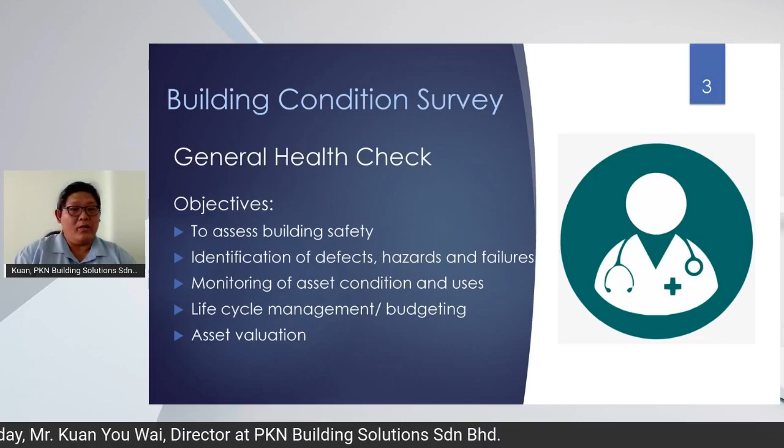We'll talk about building condition survey - basically how often the property manager should go down to the field to do assessment of the building. It's a general health check. The objective is to ascertain - the first duty of JMB and MC is building safety - to identify potential hazards, monitor the condition of the building, life cycle management, and asset valuation.

The Malaysia Property Management Standard number 3 covers building condition reports. When the property manager first receives a new building or takes over a building, the property manager shall carry out a general visual inspection audit to establish the current state of repair and condition of the building. This is written by the board, BOVAEA, for the requirement of property managers to conduct building condition surveys. You are required only to do visual inspection, and in the event that an expert is needed, the standard is written in such a way that, at the own cost of the JMB or MC, you can recommend and appoint a third-party expert to come in to help you fully understand the condition of your building.

So who actually conducts the building condition survey? The property manager needs to conduct it, of course, along with building surveyors, architects, engineers, specialist tradesmen, leak detectors, or even scientists who come down and do specialist inspections in the event of complicated issues.

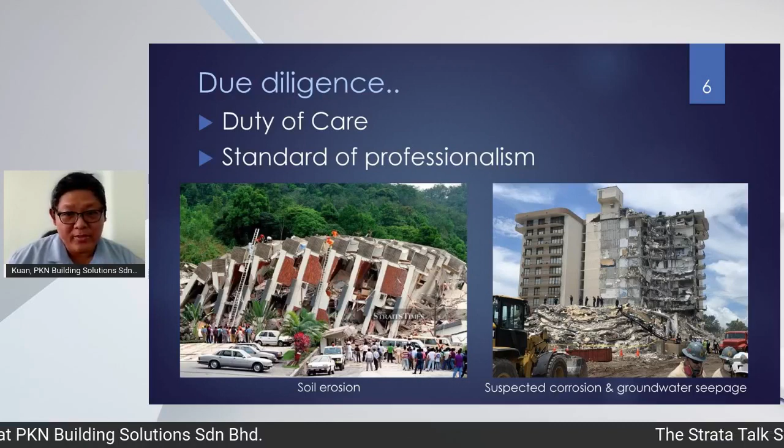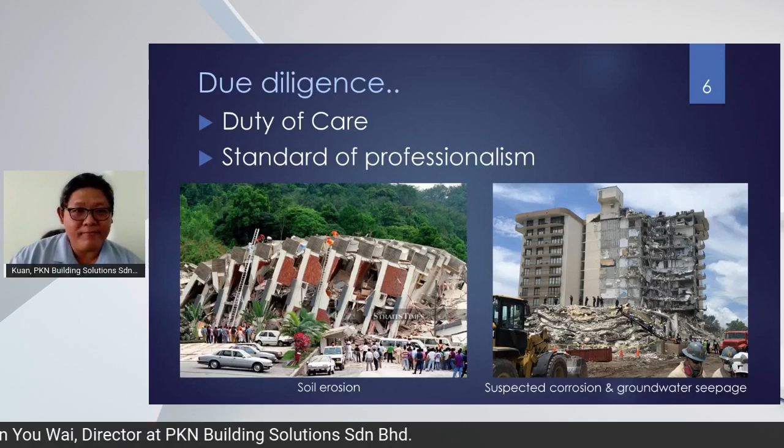But frankly speaking, when something happens, this is not really true. For example, in the event of the collapse of the Champlain Towers South in Florida two years ago - in that situation, the JMB, the property manager, even the building inspector, the building engineer who came to inspect, even the engineer from the local council who said the building was safe - now they're all queuing up in court to be queried. I'm telling you this because in reality, if something happens, the standard of professionalism will not simply be similar to what most people ought to do - you need to actually travel the extra mile to make sure your building is safe.

Due diligence for property manager: always ask why it happened, what is the correct way to repair it, what is the preventive measure, and do you have enough fund for all this rectification, inspection, and monitoring.

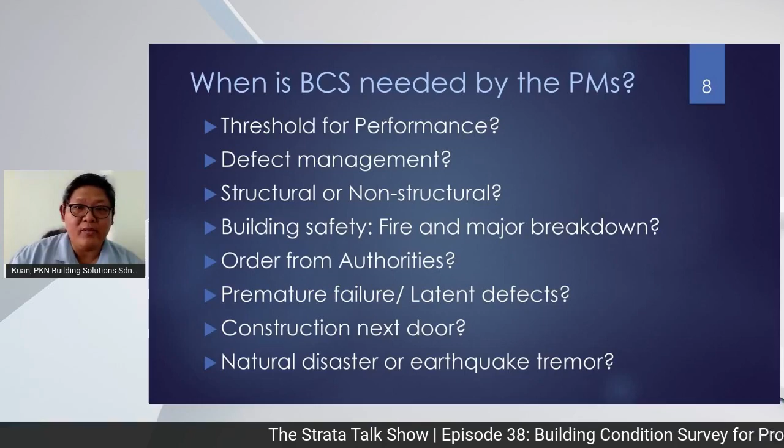So when is a building condition survey needed by the property manager? As I mentioned, it can be a threshold for performance, a key performance indicator for the property manager. It can also be required if you have a defect, which could be structural or non-structural, due to fire, due to order from the authority, or some premature or latent defect.

Just for your information, in the Strata Management Act there's no provision that allows you to use the sinking fund or maintenance fund to rectify defects, especially defects left over by the developer. You need to pursue or follow the SOP for patent defect before the expiry of DLP, and the Limitation Amendment Act for latent defect after the expiry of DLP.

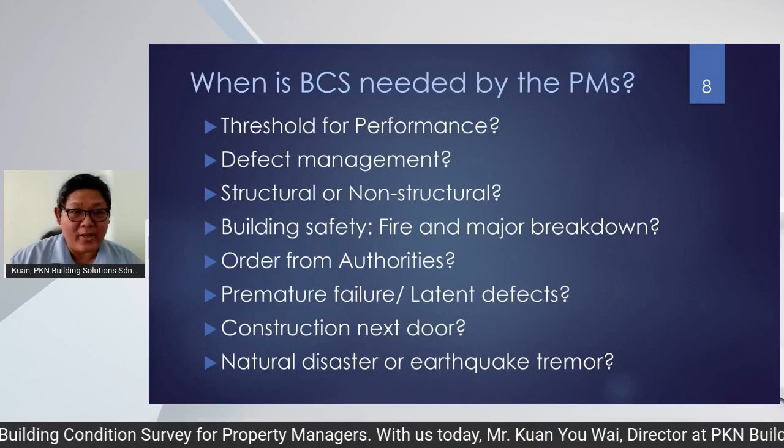And if you have a huge construction next door, you are also required to closely monitor and take more diligent steps to monitor all the cracks prior to the construction work next door. And if there is a natural disaster like earthquake or landslide nearby your area, you will also need to take more precaution and take a closer look at the condition of your building.

So how long should each building component be monitored? There's no guideline in Malaysia, but I found one from Hong Kong. Hong Kong is a Commonwealth country, and it is an urban area where everyone is required to come down to the ground floor, according to my friends—there's not enough land for people to stand. So anything that happens to the building will be detrimental to their people.

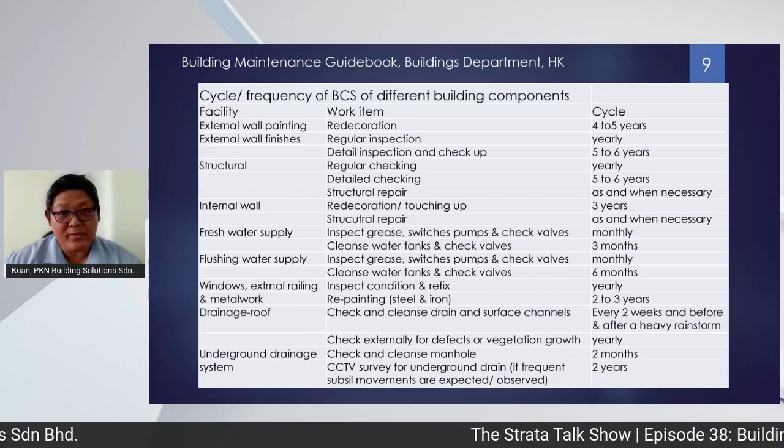As a result, Hong Kong has very strict guidelines in the maintenance of their residential and all other buildings. In fact, these are the list of items that need to be monitored. For instance, external wall painting—every 4 to 5 years you have to check one round, to see whether you need to do painting. This is a list of items you should check based on different periodic intervals.

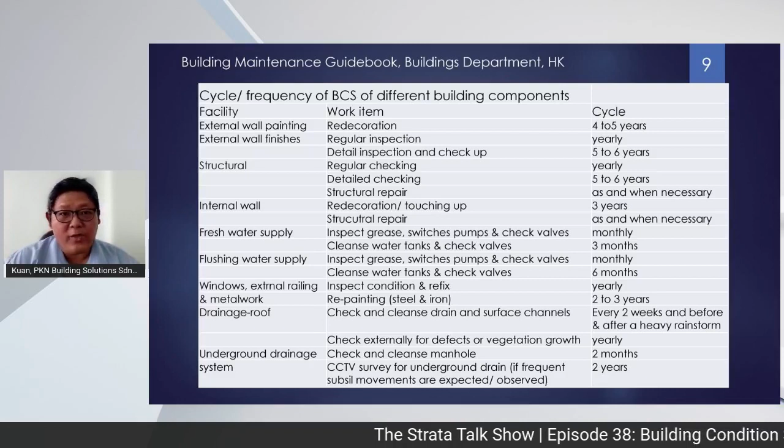Microsoft Project can help you compile a schedule for different types of inspection. There's no standard format—it all depends on the condition and age of your building. So a project management tool like this will be very helpful in this case.

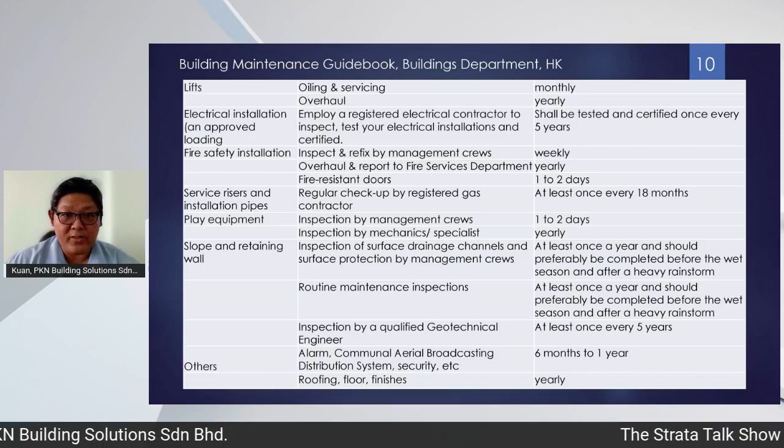The list also continues for electrical installation, every 5 years, and some items like fire safety installation, even on a weekly basis.

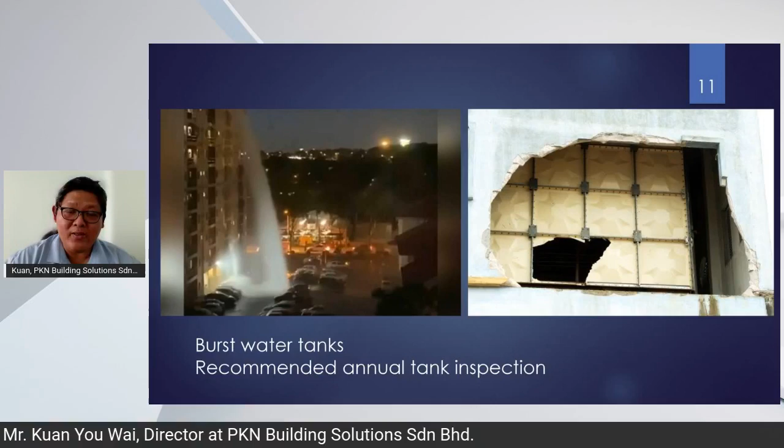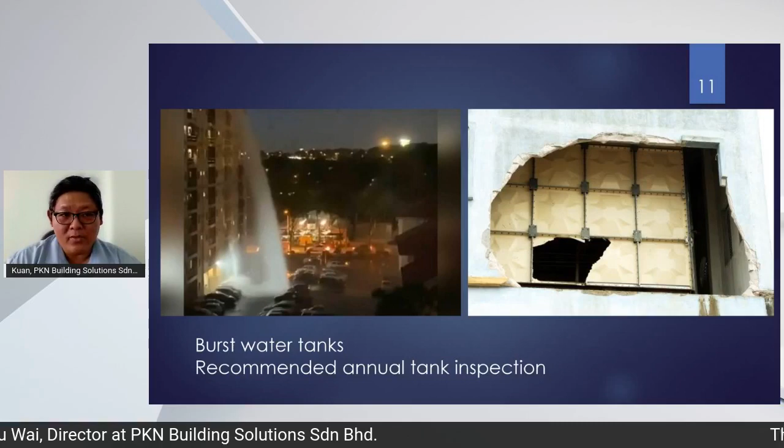But something I want to highlight now: we have a lot of problems with water tanks nowadays. My conversation with some former COBs actually told me this is in fact quite common, because our water tank is most of the time subjected to weathering—subjected to rainfall, subjected to sunshine—and polymer or metal material will degrade rapidly in the event of weathering, especially if you are close to an industrial area. The acidity of the rainwater will even accelerate the degradation further.

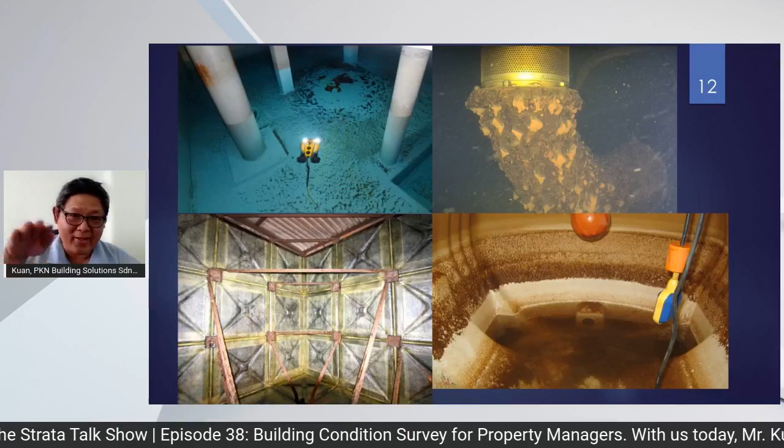As a result, we have a number of issues nowadays with water tanks bursting and walls collapsing. In UK, Australia, and Singapore, it's recommended, and actually made mandatory nowadays in some countries, that all water tanks need to be inspected once a year. We have the ROV, remotely operated vehicle, which looks like a mini submarine connected to a wire, so you can clearly see what is inside the tank.

This is actually in line with what is recommended by the Ministry of Housing, KPKT, and the Ministry of Health, because the condition of the water is also a health issue since it's consumed directly.

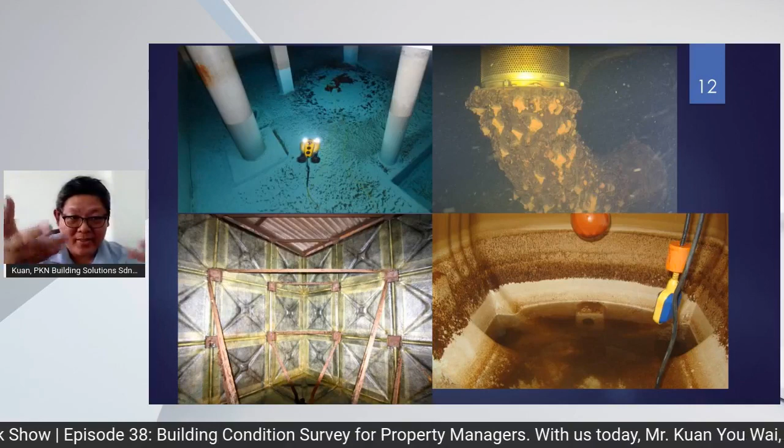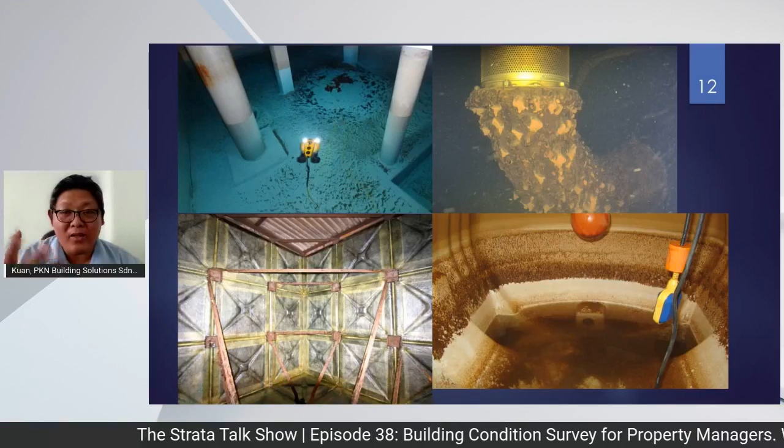Secondly, the sludge that settles at the bottom of the water tank is actually heavier. If the sludge accumulates so much that it becomes too heavy for the tank's design to hold, or the tank's metal strap starts to corrode, or the screws start to corrode, or the underwater fittings start to corrode, the strength actually starts to reduce and compromise—and that is why some water tanks can give way.

So I would suggest that for water tanks nowadays, especially in Malaysia, there is a need for regular monitoring of the water tank.

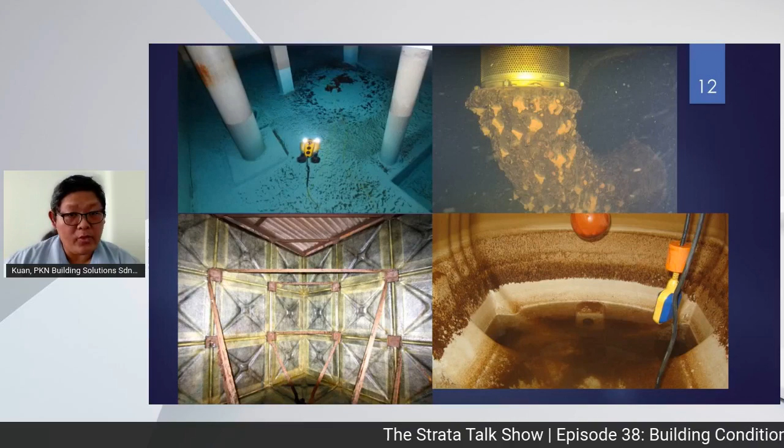And of course, there are different formats when it comes to how a report should be done for a building condition survey. There is a format from JKR, Royal Institute of Surveyors Malaysia, Royal Institute of Chartered Surveyors UK, as well as a format from DBKL.

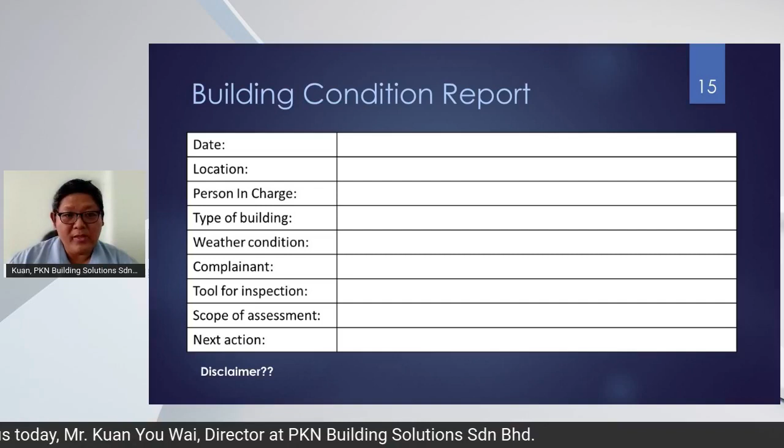Actually, in my type of report, I even have to clearly describe what is the methodology of inspection, scope of inspection, next action. This is particularly important for property managers because of the next action, and who is the person in charge. These are the details that you need to have when you do follow up. And I always encourage property managers to have a few simple testing tools like this, or inspection tools like this.

Moisture meter, it has one anode and one cathode. If you put it on the surface with water, then the circuit is completed. The more water on the surface, the more electricity conducted. As a result, you have a linear relationship between the reading and the amount of dampness. And this is very useful. And it can be used for even doing ponding tests, flood tests.

Before I do a ponding test, I will take a moisture reading one time before and one time 24 hours after the ponding test, using a moisture meter, because it can quantify the dampness, and I have a figure for comparison. Tapping rod is very important to check hollowness, and corrosion starts from delamination. That's why when we check corrosion, we actually start by checking delamination. As a result, tapping rod is very useful.

And because water can conduct electricity, before you put your hand on any wet area, please have a non-contact voltage tester to verify that the place doesn't have electricity. This is for your own health, own safety. And a pressure gauge like this can verify the pressure in your domestic pipe. Bear in mind, Suruhanjaya Perkhidmatan Air Negara has a guideline. The water pressure should be between 10 meter head to 30 meter head, or 0.98 bar to 2.94 bar.

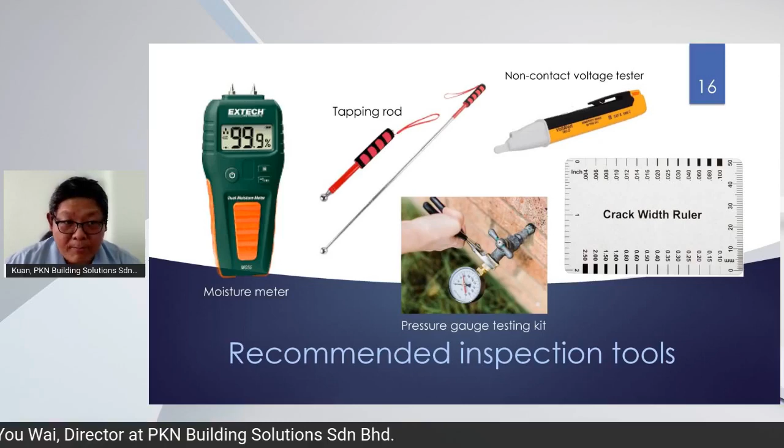This is something that you have to keep on monitoring, because in the event that you supply unsafe water pressure to the unit and the pipe bursts, management kena bayar. Okay. And of course, crack width ruler: based on British Standard 8110, any crack width more than 0.3 mm is a structural crack. Of course, on a structural element.

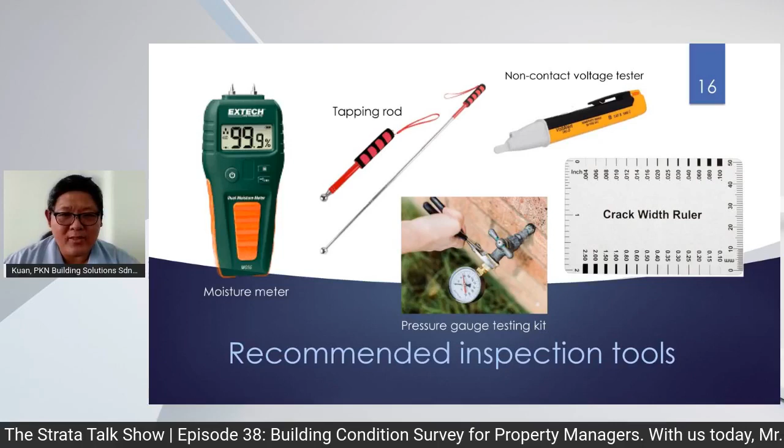Okay, so all these are simple equipment that doesn't cost a lot. Maybe the most expensive one is the Extech moisture meter, which can cost around 300 ringgit. But the rest is not expensive. So I would urge property managers to have this equipment with you to closely monitor your building.

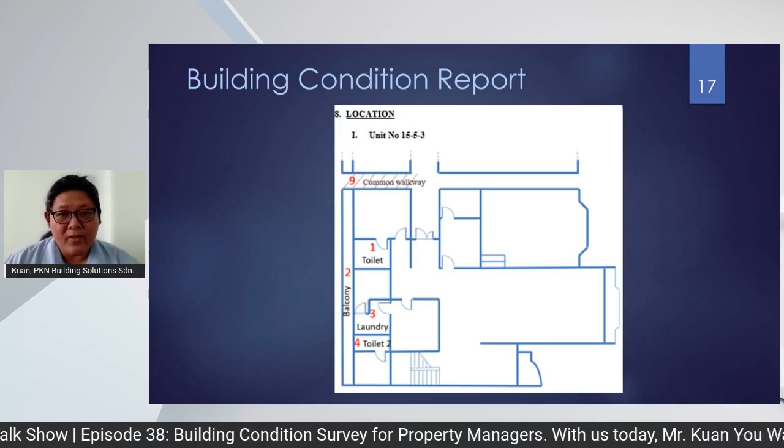So next is the building condition report. Of course, for a building condition report, you need to have a floor plan to indicate where you do the inspection. So in my type of report, let's say for a house, I will indicate photo number one or defect sheet number one, which actually corresponds to number one in this floor plan. So defect sheet number two is the second location.

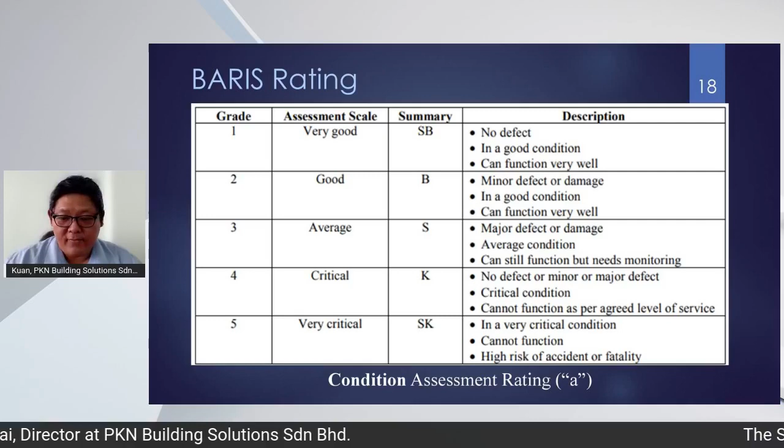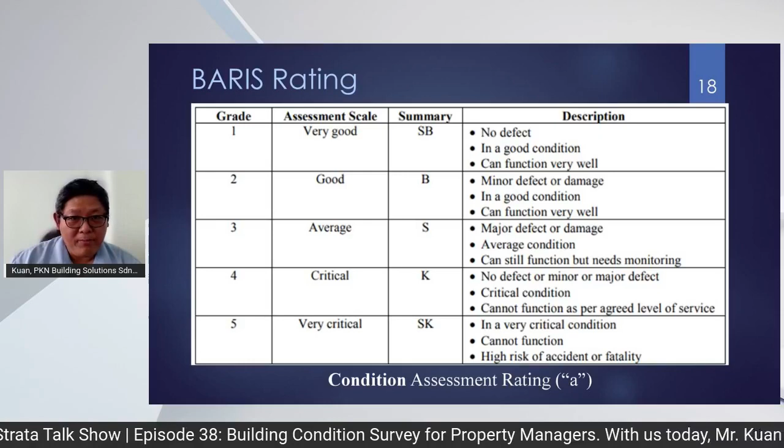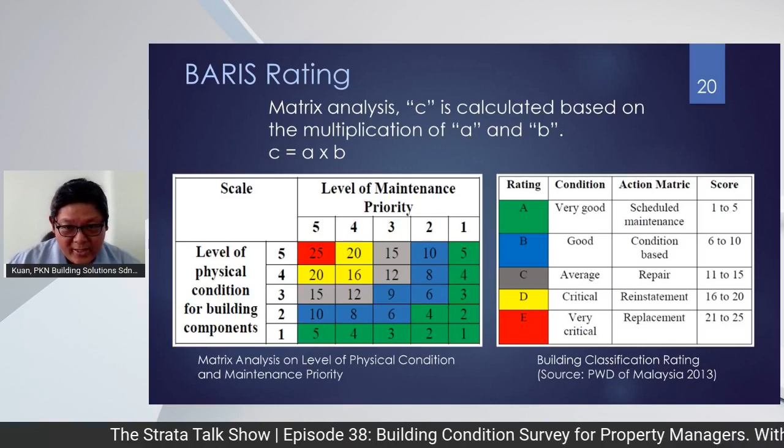Okay, this is, let's say, just now level of maintenance and level of physical condition. So level of maintenance means does it need to be replaced now, or is it just a regular maintenance issue? So it has different numbers, and as compared to the different number assigned for the condition of the building, when you multiply it, the different number actually gives a different rating. So in the second table, for the rating condition, action matrix and score, it gives an indication of the condition of the whole building if you sum up all the items together.

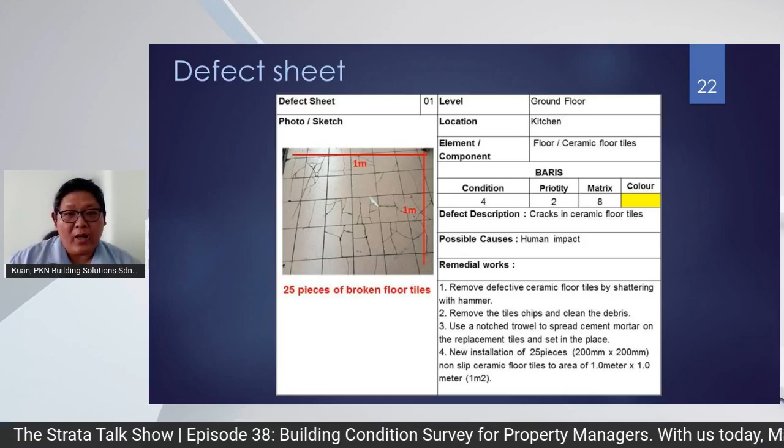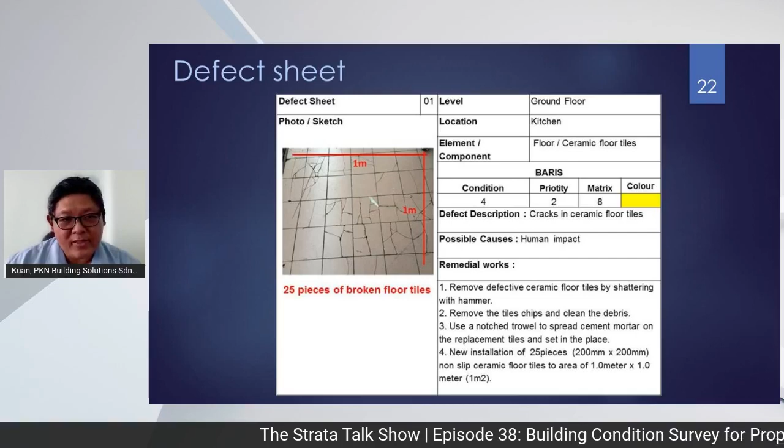Okay, so this is how my report looks like. This is the JKR report. Okay, I think I'll go to this JKR report first because the JKR report has columns for narration as well as a column for the photo. I find this format doesn't offer enough space for the photo. As such, I modified the format to maximize the area for the photo.

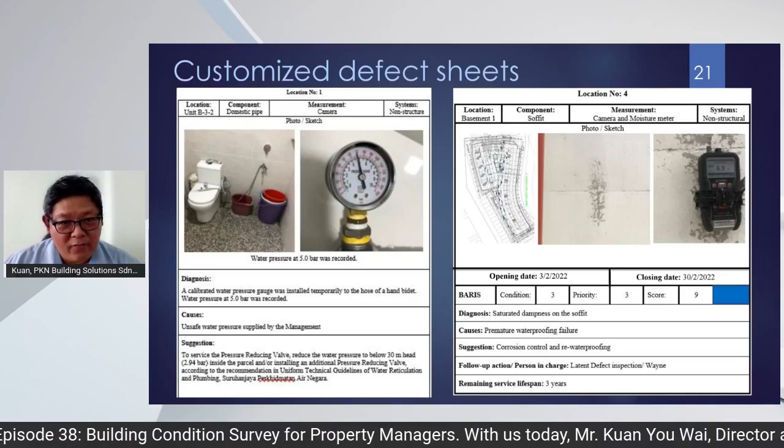And let's say the first one. First one, I put all the detail at the top and at the bottom. Center, I keep the maximum space for the photo. And this modification, so long that it works for you, is fine. There's no fixed format for it. And this format I actually use for one shot or one time inspection.

If for the purpose of monitoring, you can have more detail. Let's say opening date. When was the first complaint? When is the closing date? Closing date means the defect has been rectified. The case should be closed. The diagnosis, the cause, the suggestion, the score can be also included, and I even include a small floor plan to indicate the location so that I don't need to go back to the page with a lot of locations. It is for easy reference purposes.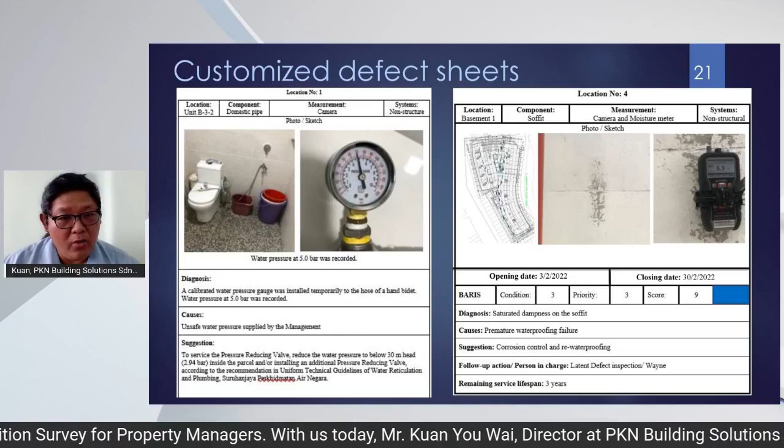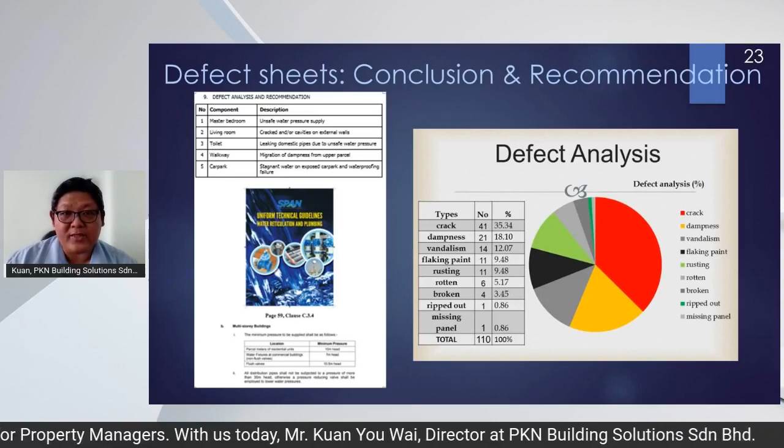So my point is you can modify the format to your own need, so long that whatever information you would like to monitor is all systematically written there. Okay, and in my kind of report, I will also have a conclusion about the overall assessment, the overall summary, and I also can do a chart in this way to tell what type of defect or problem or issues is mostly found in your site. So with this, an overall picture can be given. So this is about the format of the report.

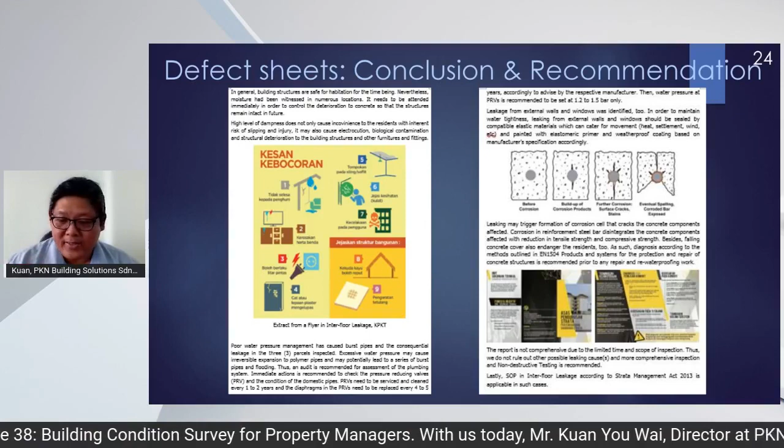Okay, and I also have big space to do a narration or summary of what is the next action. At this location, this conclusion and recommendation, I can have the luxury of sufficient space to do all types of explanation for the typical types of defects. This is the format of my report. And I would like to bring your attention to life cycle management and building safety.

So 10% sinking fund. From my conversation with a number of property managers, 10% sinking fund is the mandatory requirement set during the developer regime, whereby the developer becomes the property manager before the formation of JMB or MC. So okay, but for your information, this is the minimum. It's not the maximum.

In fact, based on the list that I explained just now, we need to do the asset listing. We need to know the life cycle management by understanding when these building components need replacement or refurbishment or redecoration, and we need to do a projection, a project management chart, to see in 10 years which year I need to do my painting, which year I need to replace my lift, so that we can have an overall understanding of the capital expenditure that will be coming in 10, 20 or 30 years to come.

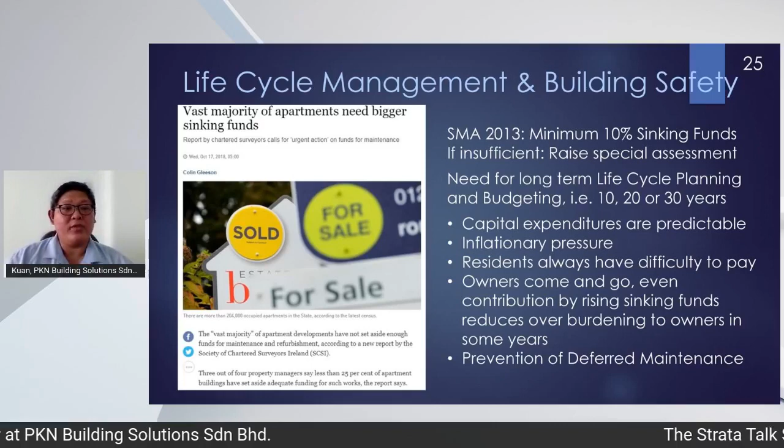So based on the collection of our existing sinking fund, is it sufficient to cover all the capital expenditure? Because bear in mind, the first duty of JMB or MC is building safety. Okay, so you need to make sure you have enough fund so that in time to come, when the building components need replacement, the money is there. Okay, that is for the purpose of keeping the safety as well as the functionality of the building.

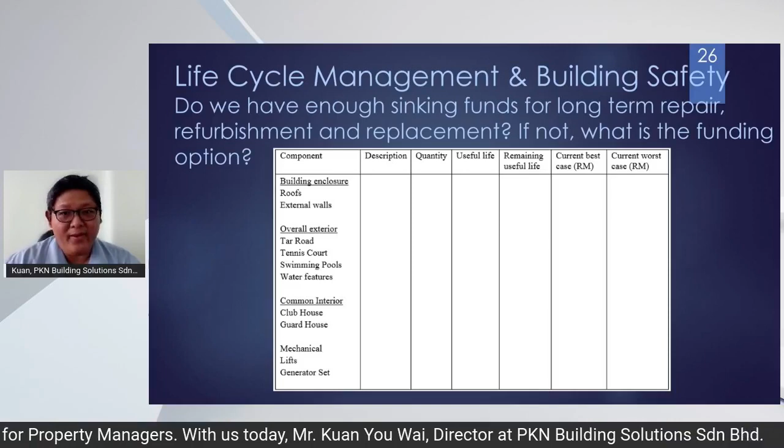And I would like to show you a useful chart that I got from the research study in North America. This is a list of the building component, the quantity, the useful lifespan, and the remaining useful lifespan, current best and current worst. What is the meaning of current best?

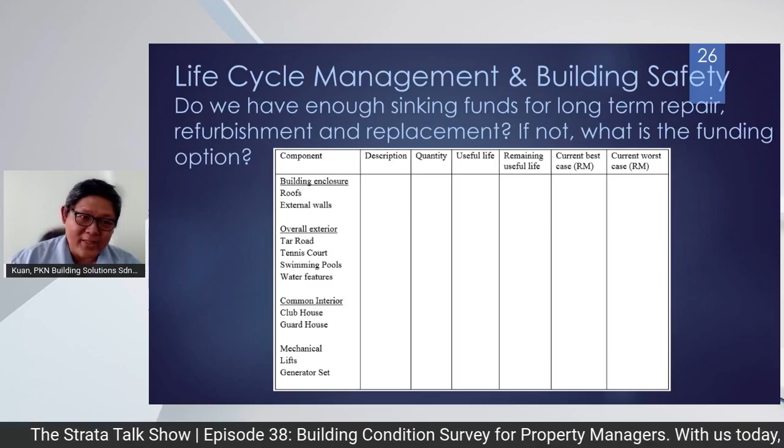Okay, let's say the genset or the lift, when it is due for replacement, what is the most positive or optimistic estimate of the expenses involved? And what is the minimum and what is the maximum. So the maximum is the current worst case. That's why we use the word current, because we need to factor in the inflation and to rediscount the amount to see if the collection that we are collecting at this amount or this percentage will be enough to finance all this capital expenditure in future.

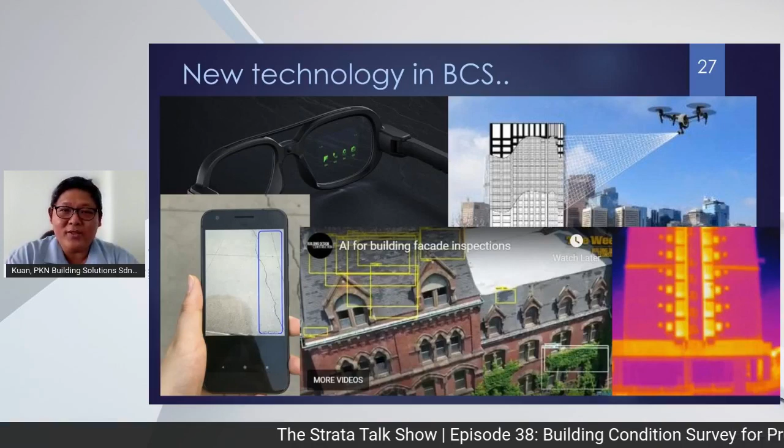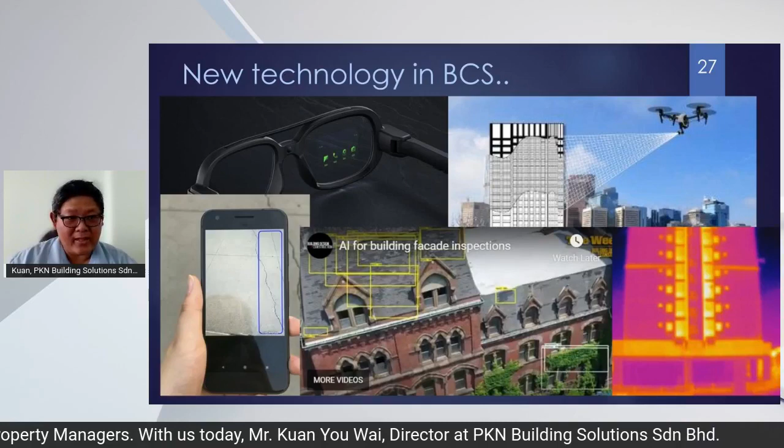So I would also like to bring your attention. Nowadays, we have so many new technologies. Artificial intelligence is coming into the building survey industry. So nowadays, we have artificial intelligence which is integrated into drones, spectacles, or even handphones that can recognize building defects by themselves, so long as we give them good enough training to know, okay, this damp patch is a defect due to dampness. So the computer actually can recognize it. From the statistical study, they can recognize it faster and more accurately than humans.

So infrared imaging is also coming into the building condition survey industry. See, this is how the artificial intelligence can detect defects by themselves using a drone. And of course, I would like to show you what are the typical defects that a property manager should look for when the building starts to age.

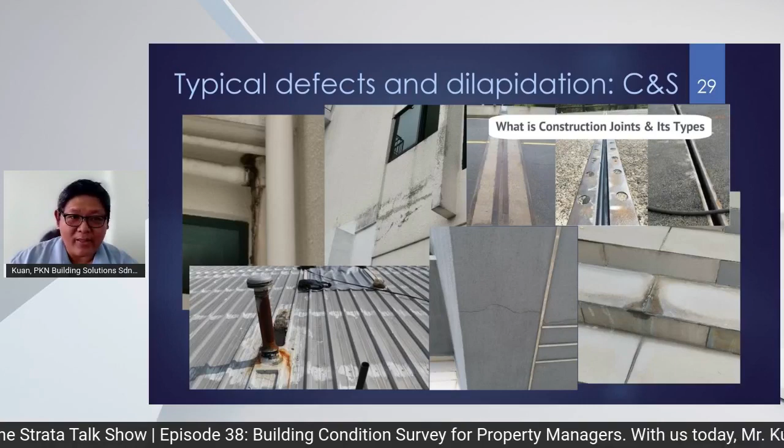Let's say the leaking, the rust, construction joints must be replaced regularly. The cracks, some are cosmetic, some are not. So efflorescence, if it is at the stairs, it's actually very dangerous. It's very slippery. Okay, so all this you have to start to look at on your site. And of course sealant on the skylight roof is something that you should understand needs replacement over time. Water tank, at least check the screws and nuts from outside.

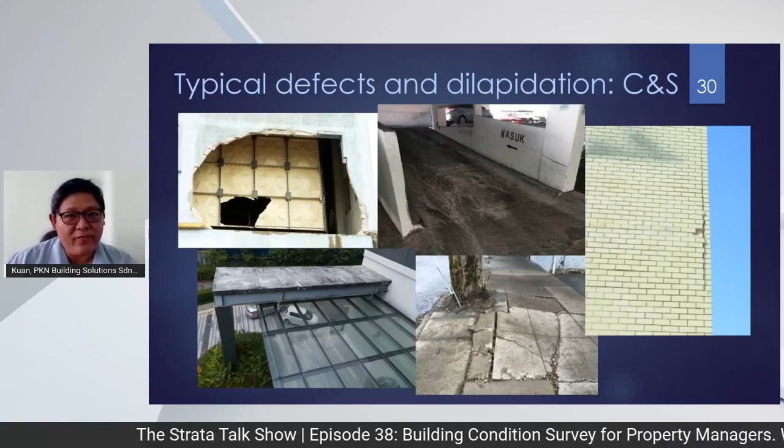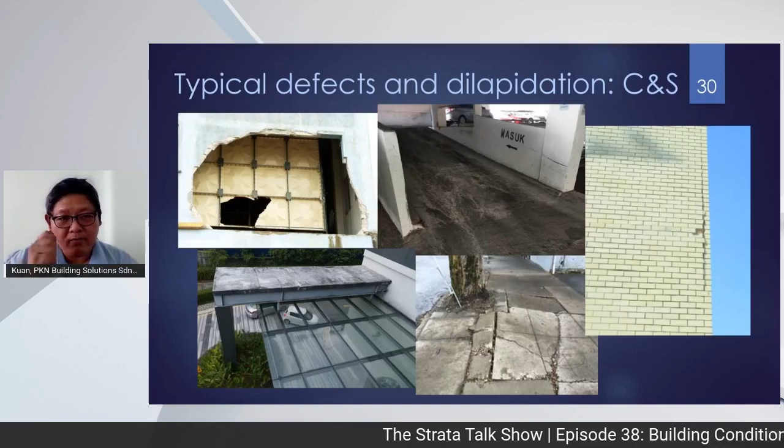The abrasion, the crack, the roots that can cause the road to crack, as well as delamination. Delamination always happens because of the way we construct buildings that don't come with construction joints or expansion joints. So with the expansion and contraction in Malaysia, we always have this type of heat-induced crack that can endanger the public and the user. So a tapping rod is a very good tool to check all this. Okay, this is something that you need to look at.

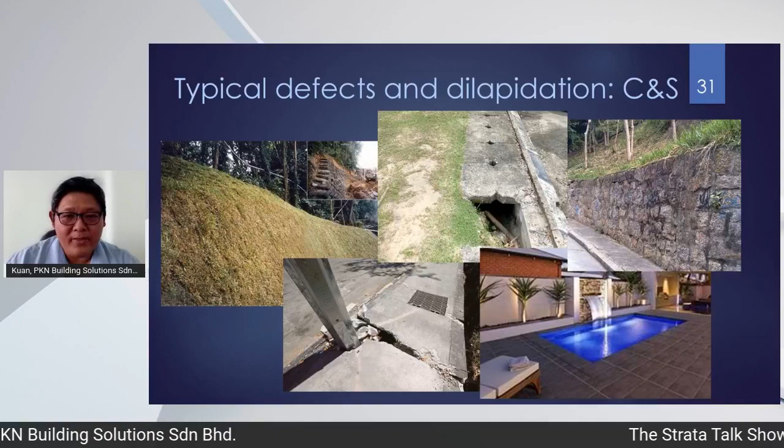Before the arrival of the rainy season, check your drain, any blockage, any crack that water can seep through. Check the slope. These are the things that you should always check. Swimming pools always leak in Malaysia. Please check. And most importantly, the M&E room must not have leakage. Okay, nowadays we have a lot of lift pits having groundwater seepage. So all this must be looked into visually by a property manager. And copper tape for your lightning arrestor always gets lost, right? So also always check on your copper tape.

Okay. When is the time that you need an expert to come in? I would like to bring your attention to high water pressure. High water pressure is synonymous to high blood pressure, because the higher the pressure, the higher the likelihood the pipe will burst. And I would urge property managers to always have a pressure gauge assembled by your people to monitor the water pressure at different locations in your building. Just simply tap into the faucet or hand bidet, and you can measure the water pressure.

And bear in mind, the pressure reducing valve needs to be serviced and cleaned. The diaphragm needs to be replaced regularly. So depending on your manufacturer, please contact your manufacturer for them to do cleaning and servicing, and ask them, with this model, this brand, how often do I need to clean and replace the diaphragm of the pressure reducing valve.

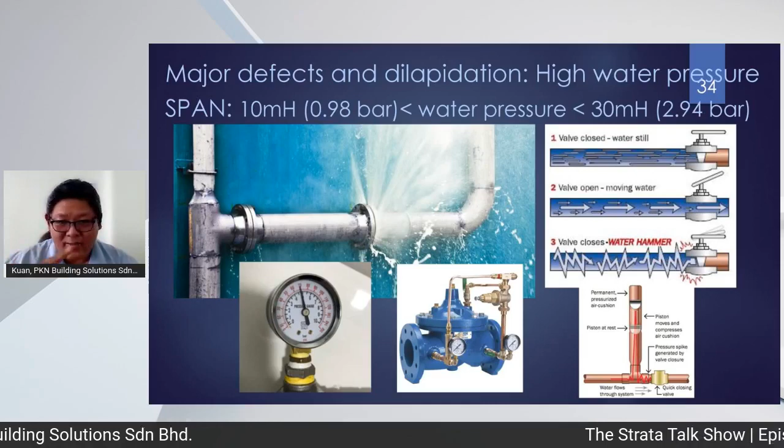And if you have the situation whereby you have the banging sound from your pipe, it's actually due to the momentum caused by the movement of water which is suddenly stopped. So this momentum can be as huge as 600 pounds, and you actually need a water hammer arrestor to handle this type of situation.

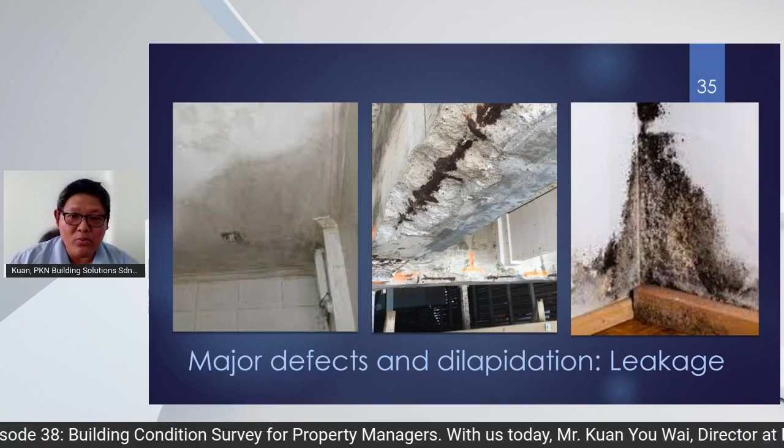So when there is corrosion, when there is seepage to your concrete, when there is mold, you do need specialists to come in. Okay, because we need scientific tools to measure the corrosion risk using the half cell corrosion mapping method. And I would like to show you. Okay, the first photo, you have some sign of dampness but no cracking, no rust. Quickly repair it.

The repair is still cheap. Okay, but if you start to have rusty signs, the reinforcement steel bar will expand, and it will keep on expanding in this corrosion process up to 6.25 times of the original diameter. As a result, the crack actually comes from inside. For your information, before any repair, the mechanism of cracking must be stopped by using cathodic protection, sacrificial anode, or

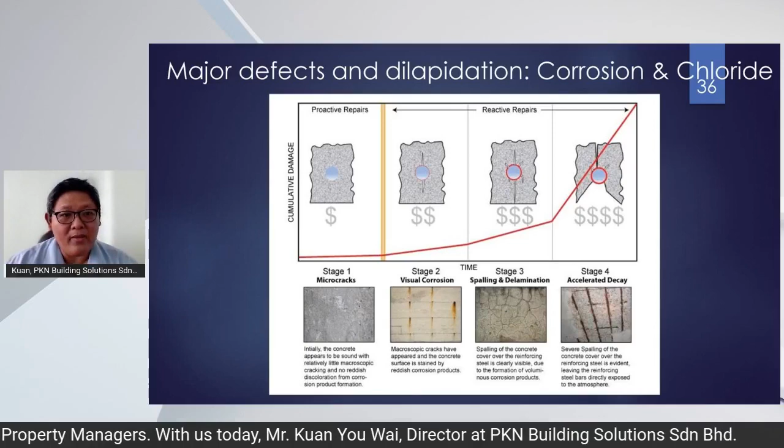corrosion inhibitor. So when you have the third stage, whereby the crack has been so obvious, delamination has started, the cost of repair is even higher. And when you have spalled concrete, the cost of repair will be so high because corrosion must be stopped. The mechanism of cracking must be stopped before you re-waterproof it. Simply because if the engineering fault or cracking mechanism is not stopped, the warranty is null and void.

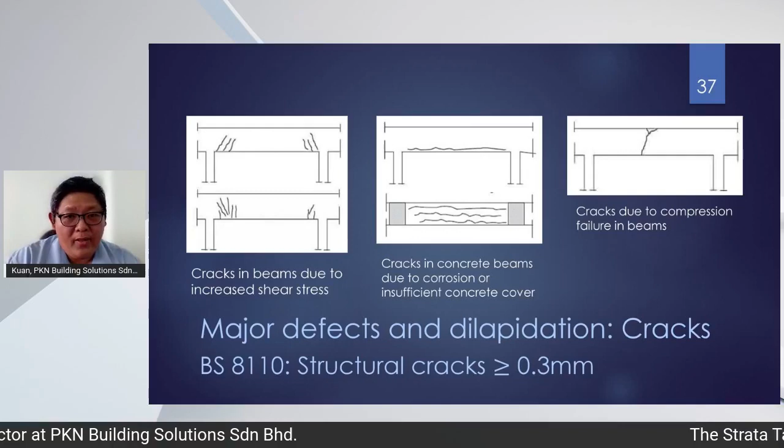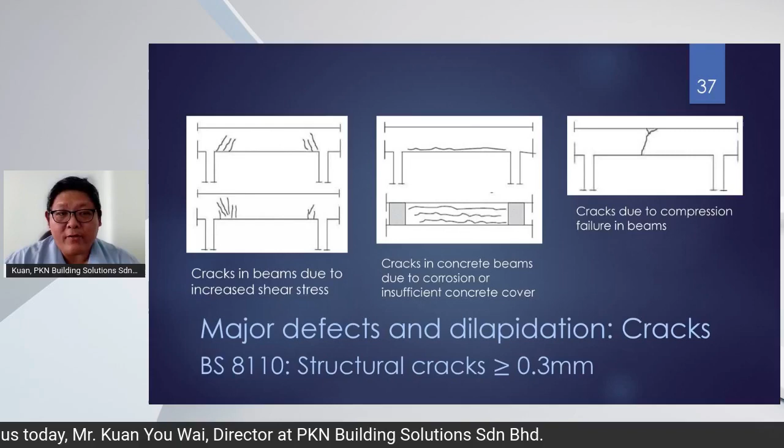Another type of thing that is dangerous: shear crack. Shear crack is very dangerous. Any structural engineer will know that. But of course, corrosion-induced crack is also dangerous. Crack at the center of the beam, from top to bottom, is also equally dangerous. For all this, there is a British standard, BS 8110, that says that if the crack is more than 0.3 mm, it is a dangerous or structural crack that you need to bring in a structural engineer for review.

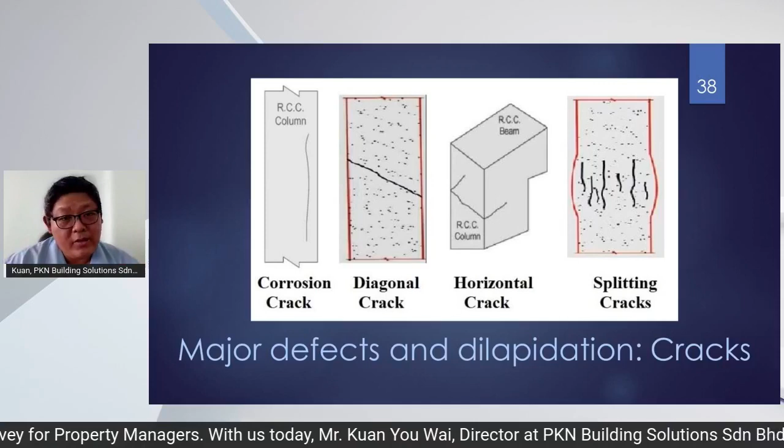Pillar. The pillar, or column, is the building component taking the maximum load. Any crack or deformation is not acceptable. So when you see this type of crack, do get in a structural engineer. And a building is not designed to float on water. And the pH and the mineral substance in the groundwater or water that emerges from the ground, it can be wastewater because the waste pipe is always embedded into the floor.

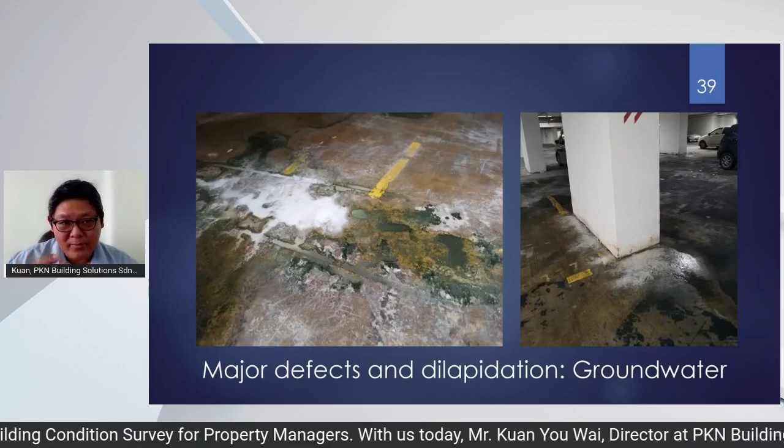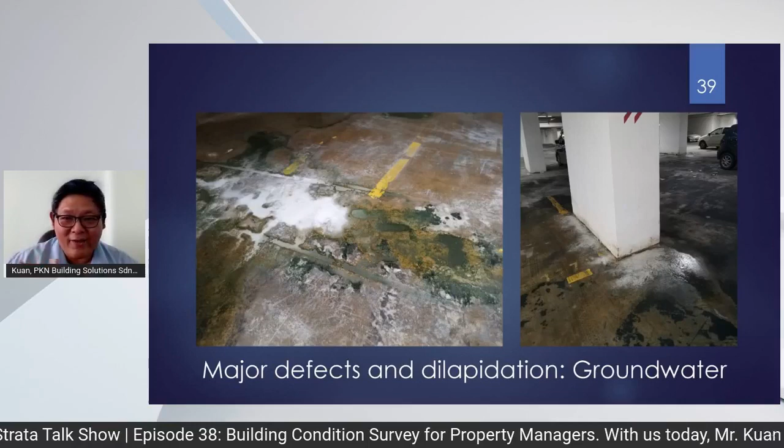We can understand the origin of the water by doing a lab test. So we can check the pH. We can also check the E. coli if it comes from the waste pipe. If it comes from domestic water, then the chemical composition must be very close to the domestic water. And lastly, if it comes from groundwater, it depends on the type of rock inside the soil. If you have a lot of limestone, the pH is highly alkaline, no corrosion will happen. The issue is if it has chloride or other chemicals that are corrosive, then corrosion will be very bad.

I would like to bring to your attention this periodic inspection because 2 days ago I met an unusual crack on a pillar, and I advised the building manager Kat that she can opt to trigger an earlier periodic inspection by writing to the Jabatan Kawalan Bangunan, Building Control Division. So, writing to them to tell that you want a periodic inspection, you feel something is wrong, you are so worried. Okay, so by writing to them, let's say in the eighth year of your building, tahun ke-8, you get all the periodic inspection done. You engage a registered structural engineer, registered with the Board of Engineers.

So everything is done. Let's say in the 10th year, the Jabatan Kawalan Bangunan sends you a letter to request you to do periodic inspection. You actually can show them this letter saying that I have written to you for early inspection and I have done it according to your SOP, and now I should be exempted because I have just done it. So in the 10th year, your letter I received, but I am telling you that I'm exempted because I have done it in the 8th year. So the next periodic inspection should be in the 18th year. So by this way, you are actually saving money.

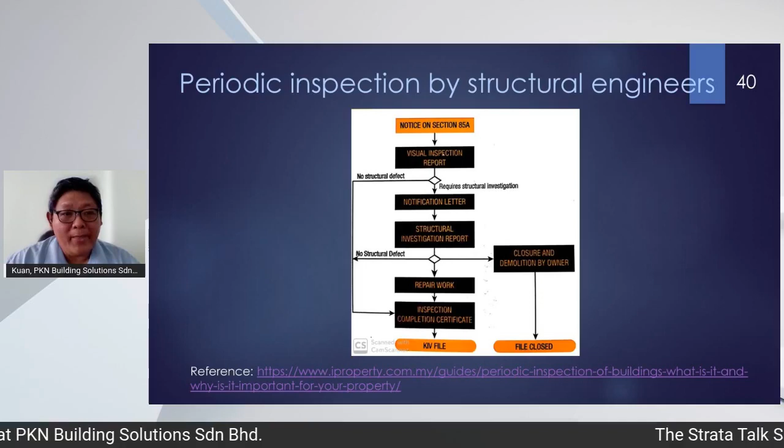At the end of the day, based on the Street, Drainage and Building Act 1974, the mayor or the Jabatan Kawalan Bangunan is the sole party, the sole authority that can tell people about the building, about the condition of your building, safe or not safe or otherwise.

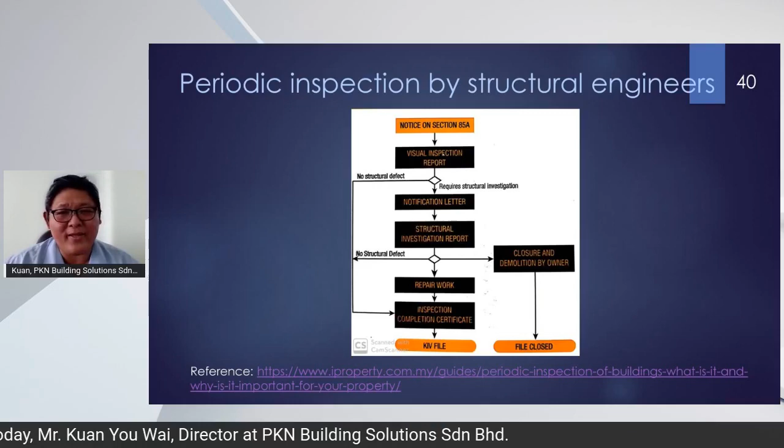So please do not hire any structural engineer just because they are structural engineers. You actually indeed have an SOP to follow based on the Street, Drainage and Building Act. Okay, so do not simply engage, but I can help you. I can advise you who can do a very good job on this.

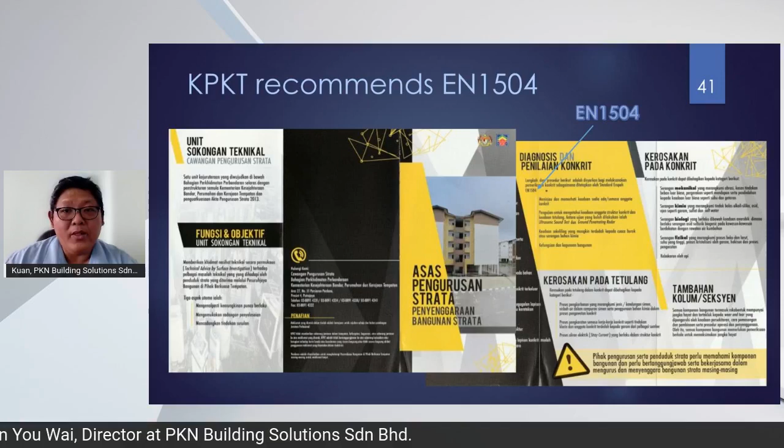And the Ministry of Housing recommends EN 1504 when it comes to diagnosis and repair of concrete structures. EN 1504 encompasses the repair of concrete as well as corrosion control. It is a holistic and scientific manner to do structural repair.

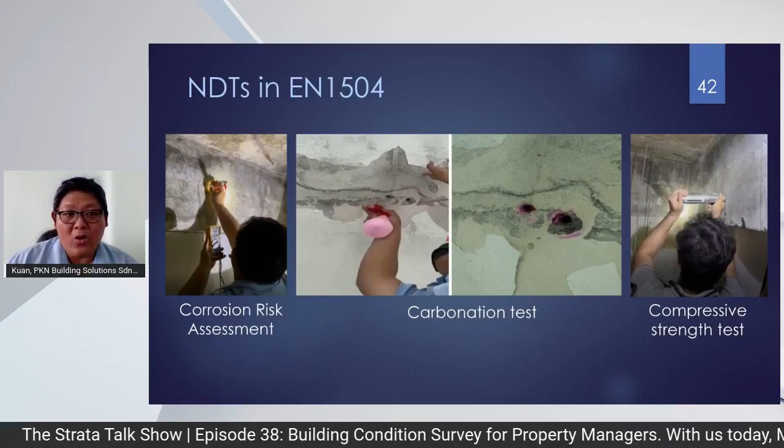So in the event that there is corrosion or cracking like this, we actually did rebound hammer testing as well as half cell corrosion mapping to see if the corrosion has started. We also do carbonation tests using phenolphthalein solution to check if the carbonation has entered into the reinforcement steel bar. All this is based on scientific method, which is based on some Euro norm or American Society for Testing and Materials standard. Okay, this is what EN 1504 recommends.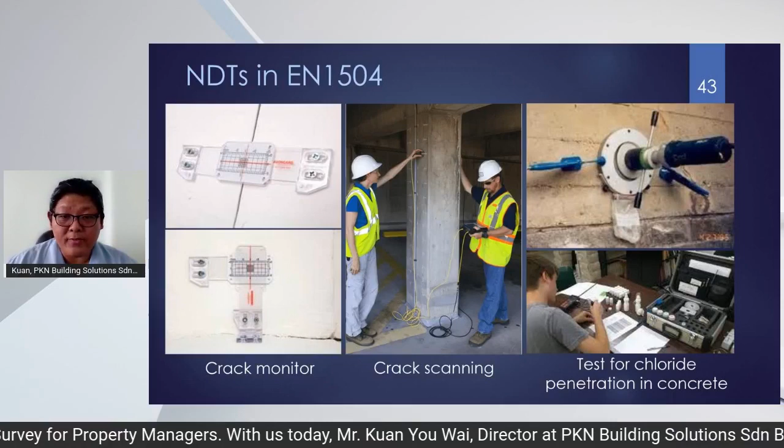So if you have a crack, you need to see if it is a dynamic or a static crack. We can install a crack monitor. We can also check the crack pattern inside the concrete using impact echo, okay, as well as doing chloride penetration tests to check the chloride contamination in your concrete. EN 1504 also recommends scanning of the reinforcement steel bar using ground penetrating radar or cover meter.

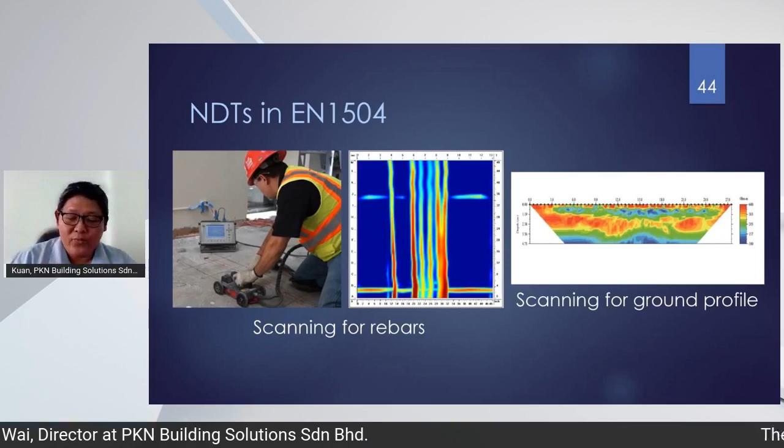Nowadays, for ground, we can also do tomography. We can do scanning of ground up to 50 meters deep, 80 meters length. Okay, if we do it cross in this way, we actually can have a 3D understanding of the soil profile as well as the groundwater profile.

And for, let's say, flat roofs, there is an ASTM standard C1153 for detecting the water pocket under the flat roof due to waterproofing failure using infrared imaging. So this is what my team is doing at different sites.

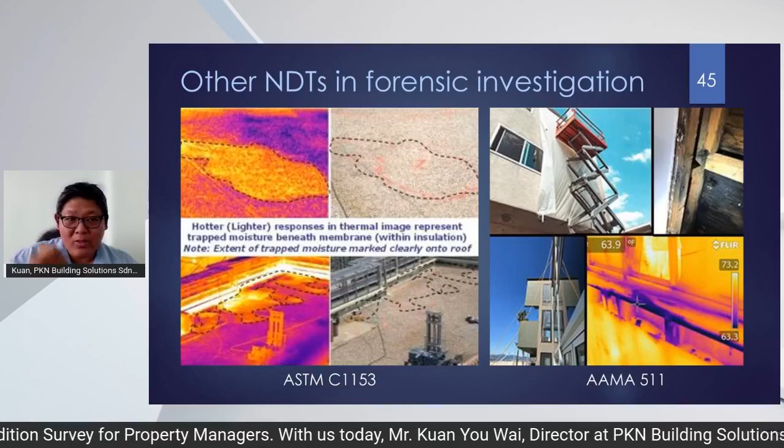And for window or external wall cracks, we also can do another test called spray testing with a special nozzle. When pressurized at 2.5 bar, the water that sprays out is equivalent to the rain induced by wind at 30 meters per second. 30 meters per second wind velocity is actually the wind loading of one of the Malaysian standards for the design of building envelopes in Malaysia.

So I would like to share a case study with you. There's a case whereby the cement screed started to fall down and splash on the road. In this case, I actually used the guideline from the Hong Kong Concrete Institute to use infrared to check the delaminated area.

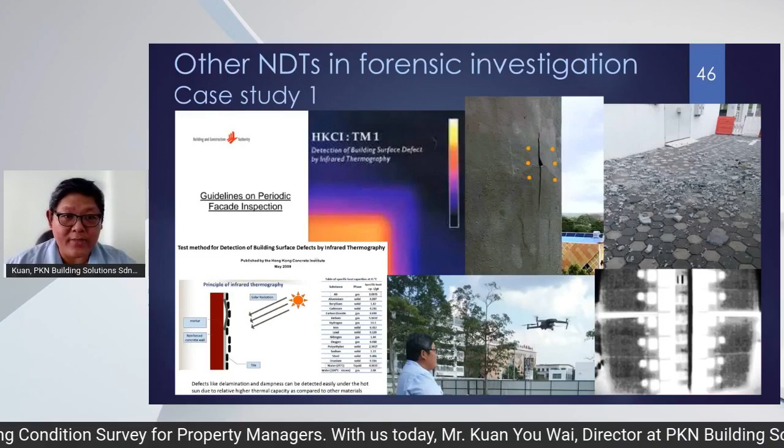Why can we use infrared? Okay, if water is hidden behind the cement screed or air is hidden behind the cement screed, when the wall is exposed to solar energy, the delaminated area will become hotter. So this is the diagrammatic explanation of the theory. And besides, we also deployed the guideline from Singapore to do close range inspection.

So this is my infrared drone, and we even erected scaffolding to extract samples to check what is behind, what is the condition of the base as well as the condition of the cement screed. We sent the cement screed sample to the lab to do a water absorption test as well as composition analysis to see how many percent of cement is there. We can also do pull-off tests and knocking tests.

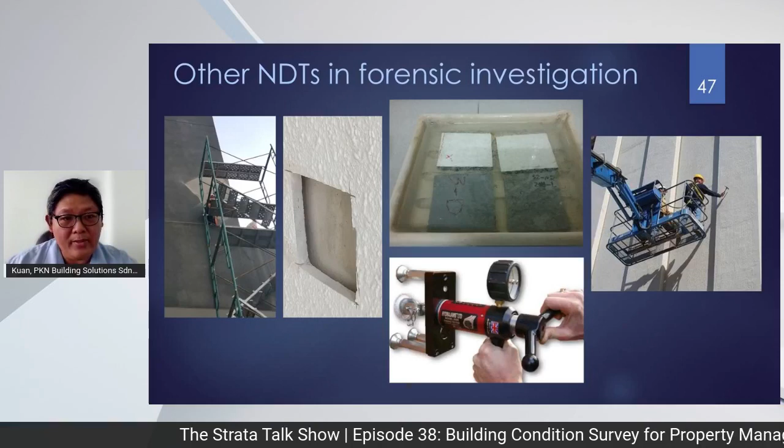So all this will help us to understand the reason why the delamination happened, so that we can have grounds to take corrective action, be it legal or be it technical.

Another case, the basement with water seepage. Okay, coincidentally, above the location there is a hydrant. So I marked A, B, C, D on the wall, and water started to drip from the hydrant. So after 2 or 3 days, I went and measured the locations A, B, C, D for a period of time, and one day I discovered the moisture level started to drop. So when I went up to the ground floor, I discovered someone had shut down the hydrant fully, so no water dripped.

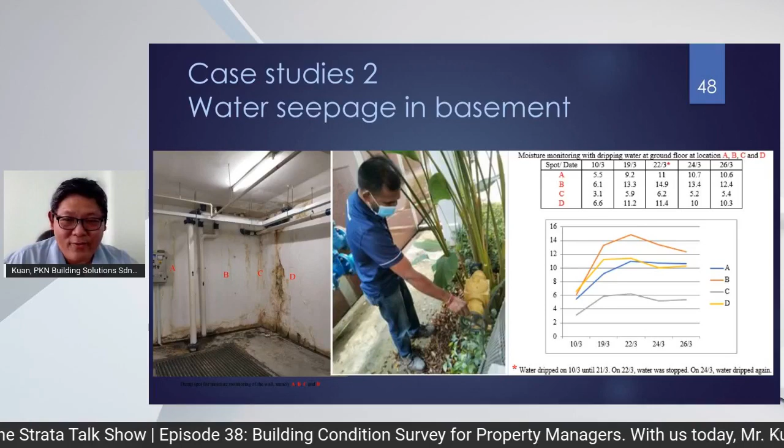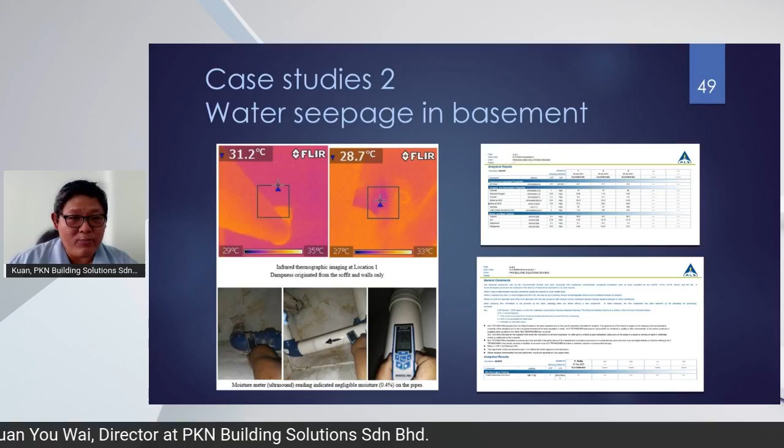To prove my case stronger, I must also use infrared imaging or moisture meter to measure the moisture level of all the pipe, because in this case, the developer says your pipe is the one, you didn't do good maintenance. So I must make sure they don't blame us on this.

So I use infrared as well as moisture meter to confirm that the pipe is not leaking. Meantime, I also send the water sample to a lab to do pH test, to do E. coli test. And I discover the rainwater is neutral, but there is no or negligible level of E. coli, so it's not wastewater.

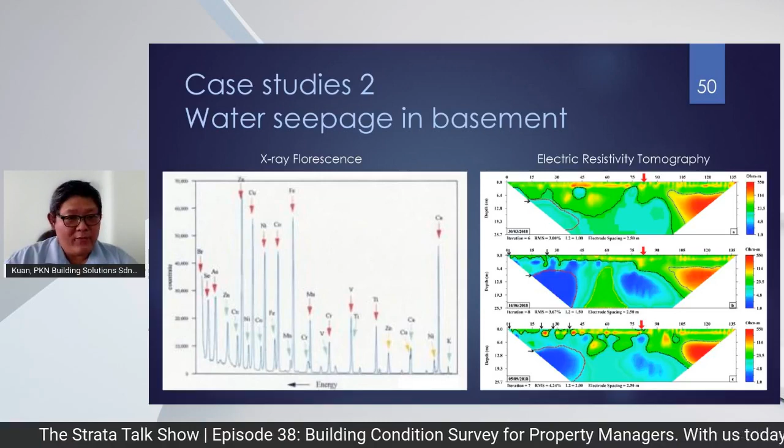And lastly, I can send it to a lab for X-ray fluorescence analysis to see the composition of the chemical in the water and get a water scientist to help me interpret the water. And of course, if the budget is enough, I can also do tomography to see the groundwater profile or the soil profile of the leaking spot.

So all this can help me to build up my case so that I know what action to be taken next. The third case study is actually about a leaking penthouse. The leaking becomes so bad, the stalactite becomes so much, and for your information, this is only 3 to 4 years old.

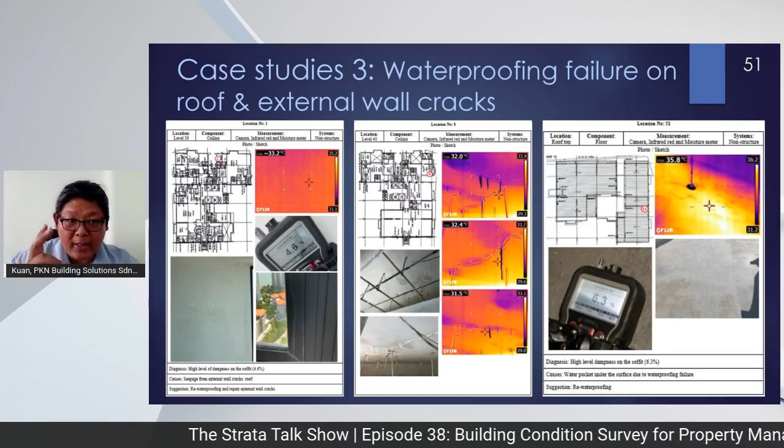And by using infrared imaging, I did a night inspection. I found the water pocket, which is yellow in color. This is the hotspot at night. And when I confirm it with my capacitance type of moisture meter, which can penetrate up to 20 mm from the surface, I can confirm the water pocket.

As such, in order to understand what is wrong, I actually remove the cement screed and expose the waterproof. So in the 8 locations that I dig, 3 didn't even have waterproof. So that's how we need to find the causation or the root cause of the problem and address it accordingly.

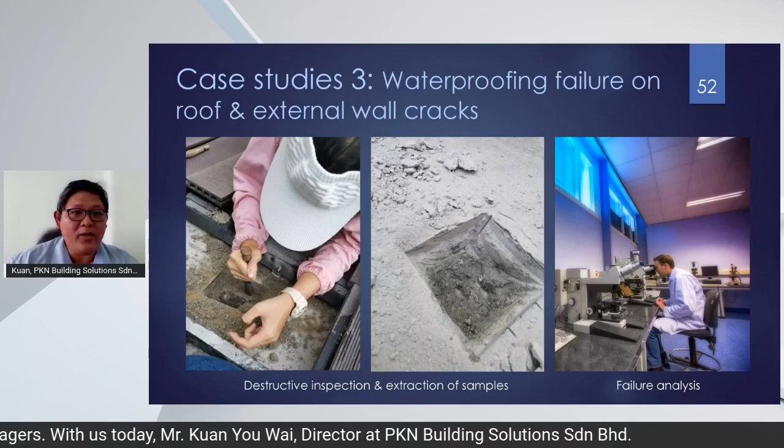Because without knowing all this, the problem will keep on dragging. We don't even have the correct information. And I also send it to the lab to check the measurement of the thickness. And this is why it happened.

Well, looking at this photo, we can understand that it's caused by heat, and the heat causes expansion to the slab in such a way that any waterproof which lacks elasticity will start to crack.

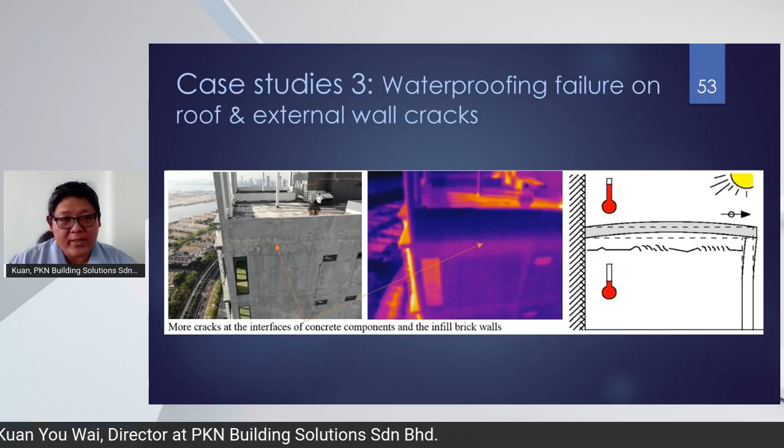In summary, property managers have very heavy duty in monitoring the building safety and functionality. Please go the extra mile, do your homework before the contractor can fool you around. So you need to do more homework to advise the committee properly and make sure to comply with the best practices as far as practicable.

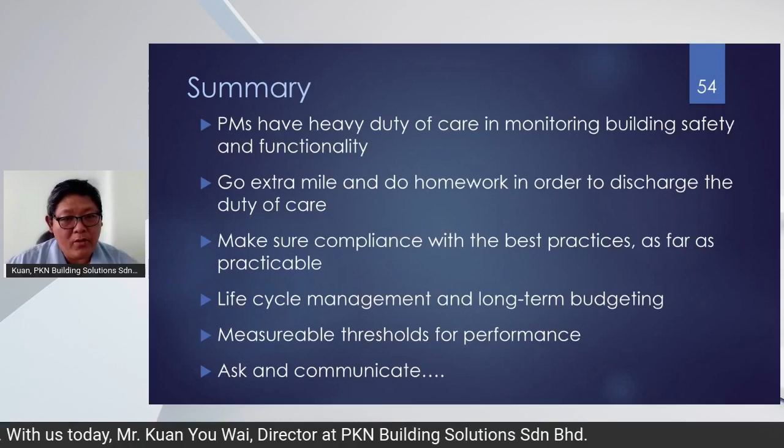Bear in mind, life cycle management is so important, and you need to have enough budget for all this. And this type of building inspection, building condition survey, is a threshold for your performance. And in the event that you do not understand, always ask and communicate. In due time, you can also contact me if you have any problem.

Okay, this is the end of my presentation. I think this is the shortest type of presentation that I have given so far, right? So I'm opening it to the audience for any questions.

Hello, any question from the floor?